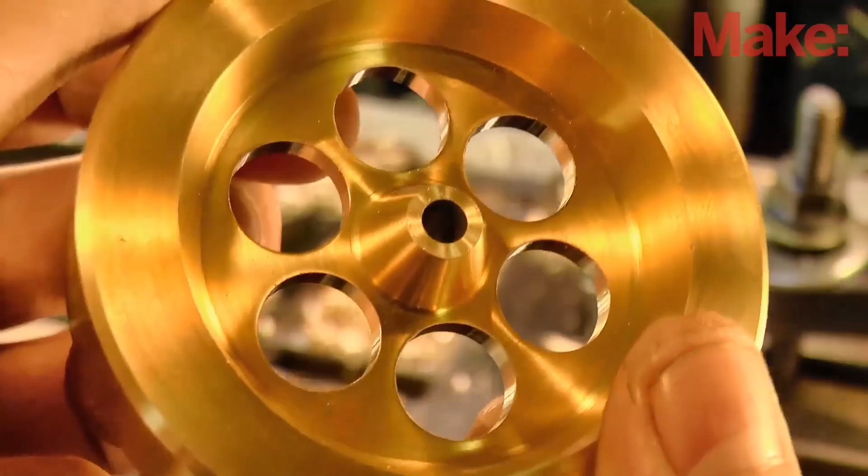In the previous video of this project, we made the flywheel for the gyroscope. In this concluding episode, we make the axle, frame and bearings and give it all a run.

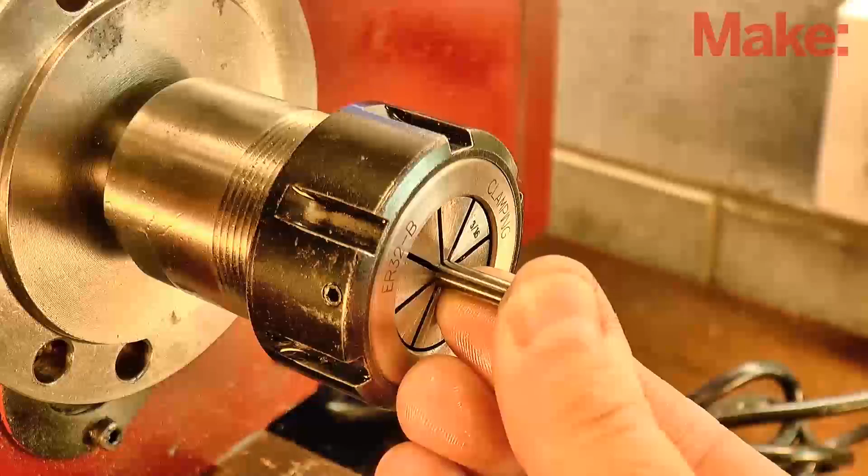Now we're going to start by making the axle, and much like the wheel, we'd like everything concentric when we finish with this part. So the way we hold the workpiece in the lathe is going to matter. You can hold the work in a collet and get it pretty close. Or if you have a four-jaw chuck, you can spend a bit of time with an indicator and get it even closer. Either way, we'd like to see the stock running as true as possible.

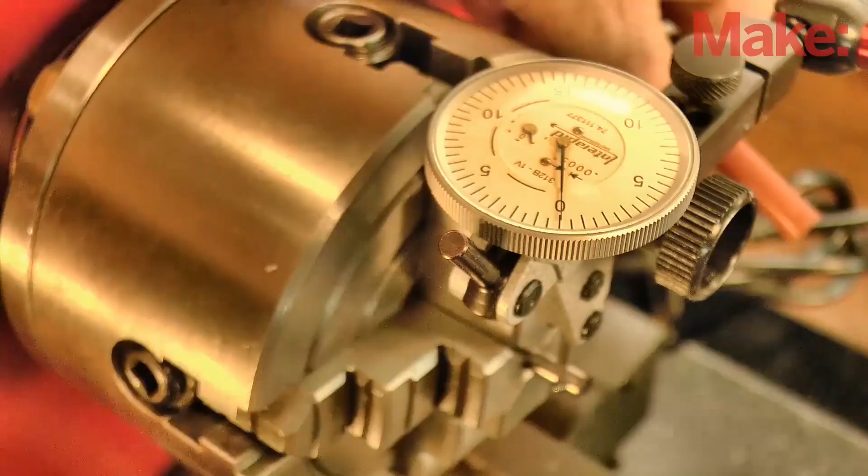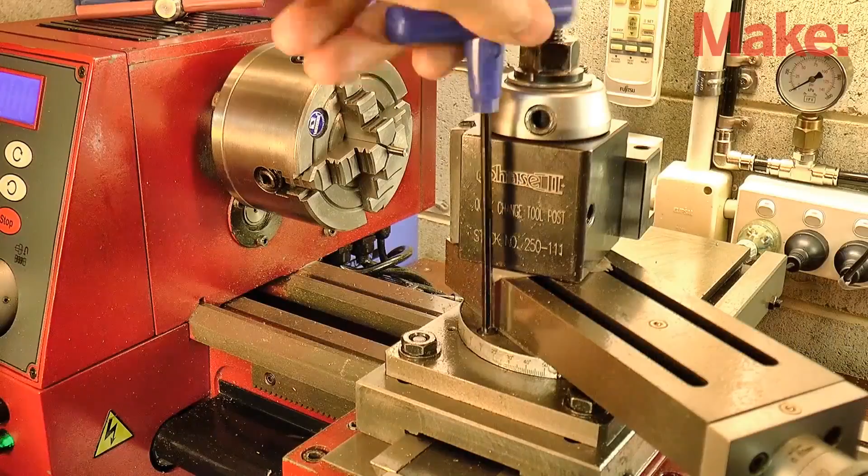If you only have a three-jaw chuck, you can get away with using that, but there'll be a small vibration when the gyroscope winds up to full speed. Once you're satisfied the stock is running true, set the compound to 30 degrees and taper cut each end of the rod.

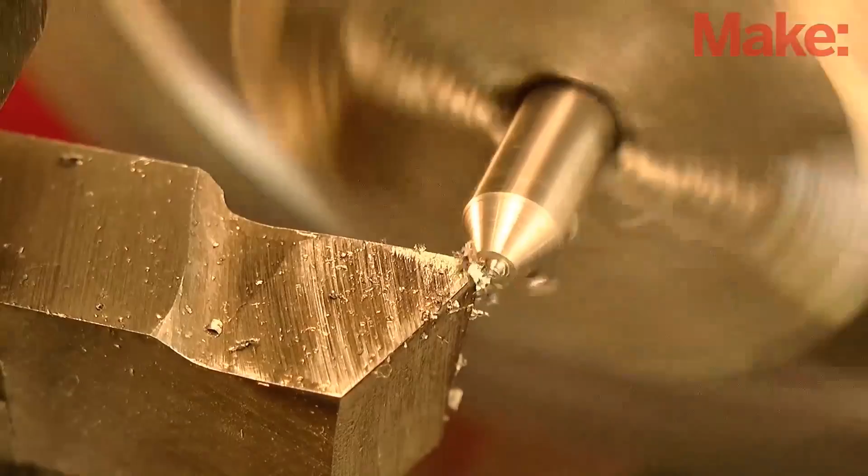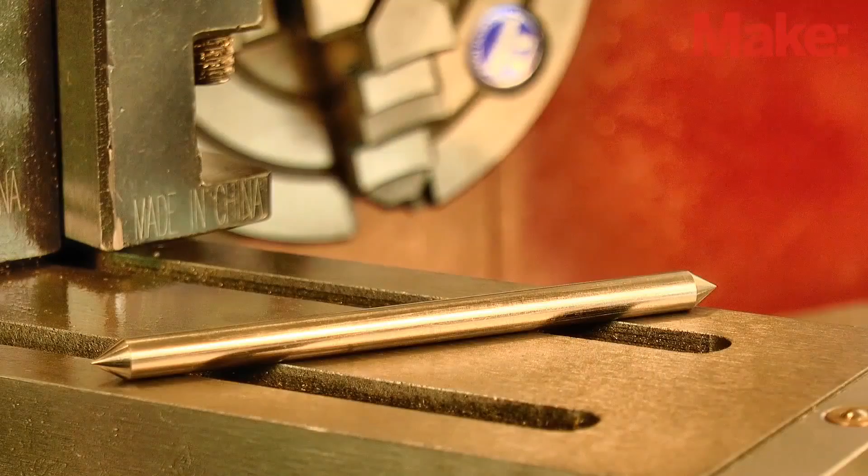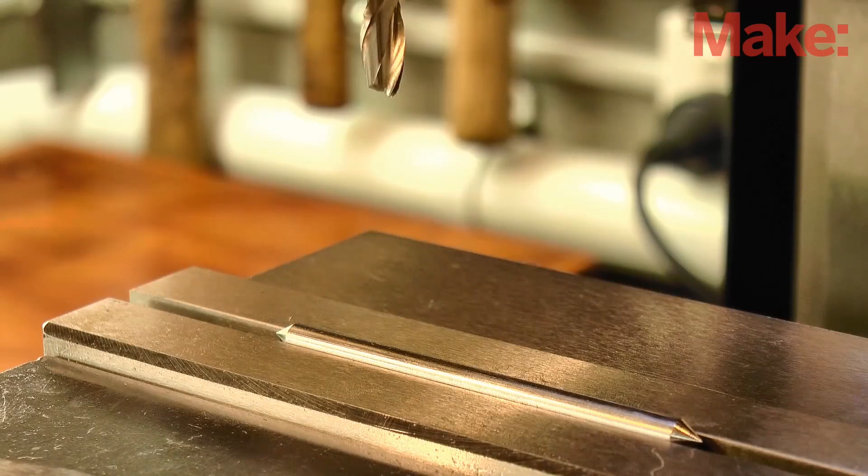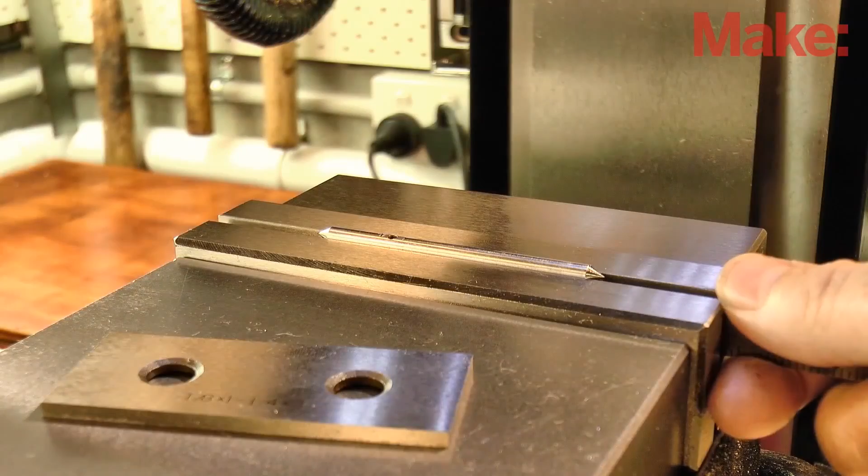Okay, next set up the work on the mill so we can cross drill a small hole for the pull cord. You'll need to mill a small flat on the top before drilling to give the bit somewhere to start. And that's the axle done for now.

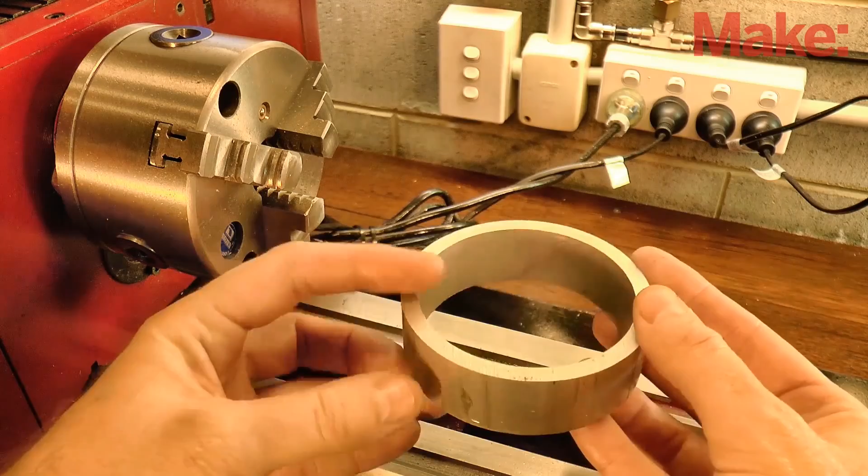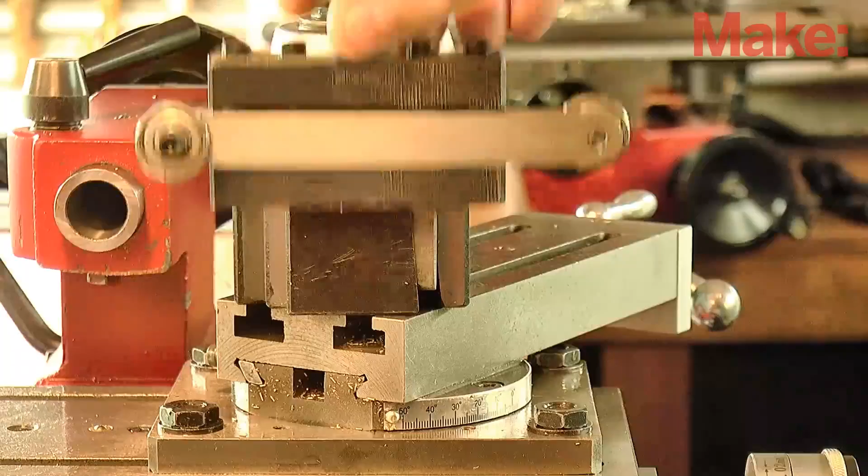Next we'll make the frame. And since it's quite a slender part, we're going to do most of the work while it's still attached to the parent stock. It'll make it more rigid and easier to hold. First, let's clean up each face on the lathe. And to do that, we need the tube running as true as we can get it. Now you can tap it true on the chuck to get it close, but here's a really simple tool that'll get you a great result.

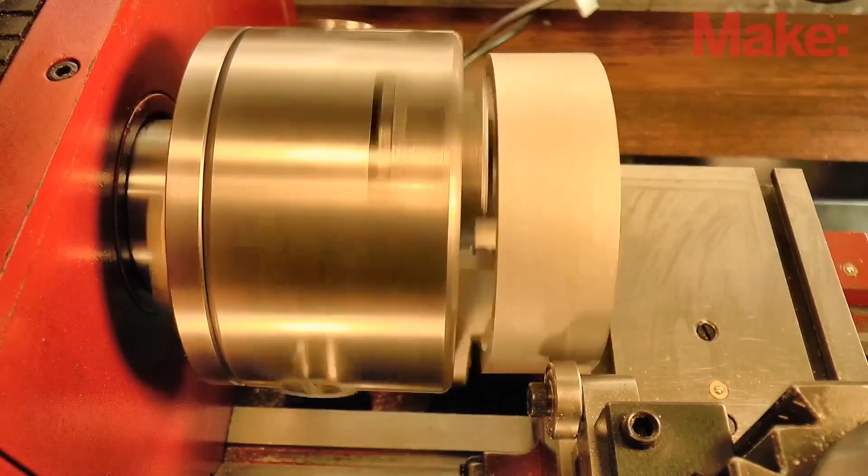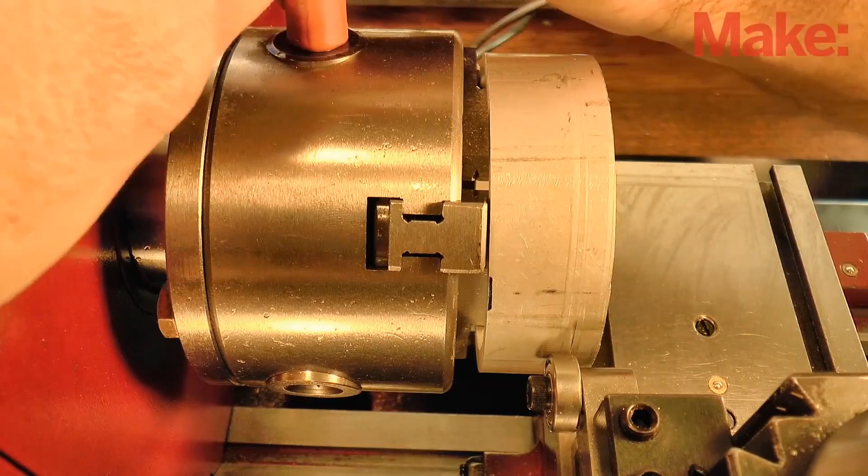It makes use of an interesting property of the lathe, where the workpiece will naturally try to centre itself when it's touched by an external force. The work is lightly held by the chuck, and then a light touch with the bearing sets it true. Once it's running true, the chuck can be tightened. It's reasonably straightforward to make one of these centering tools, and I think well worth the time spent making it, because it'll help you to centre a lot of difficult workpieces in the future.

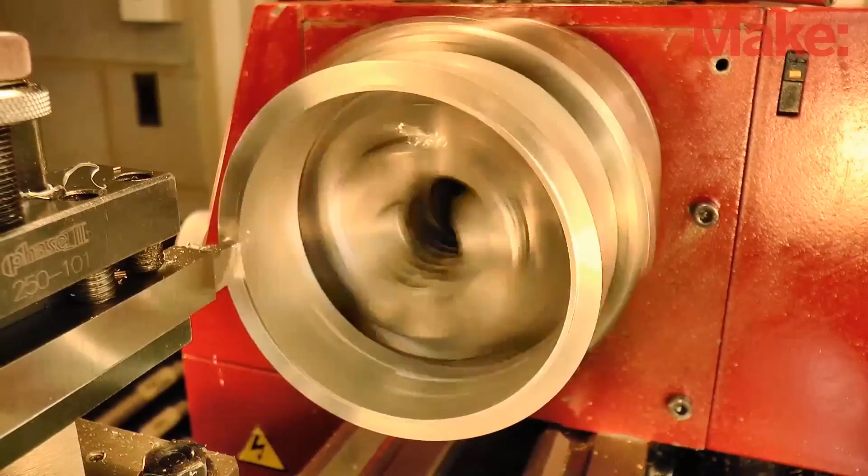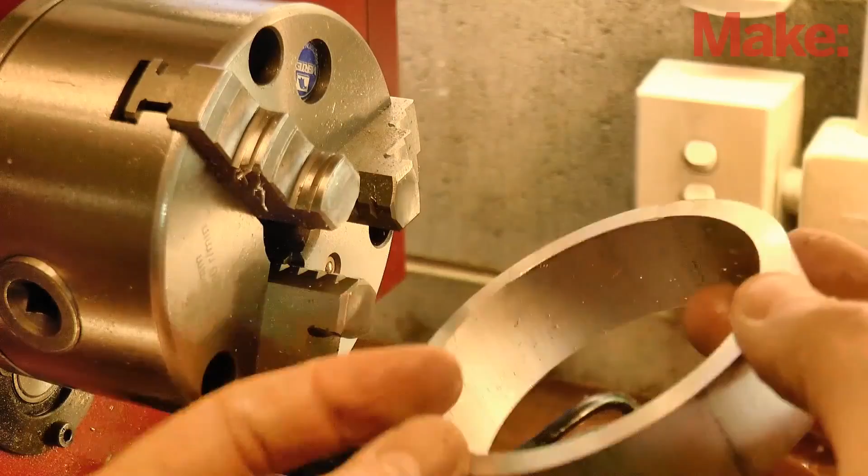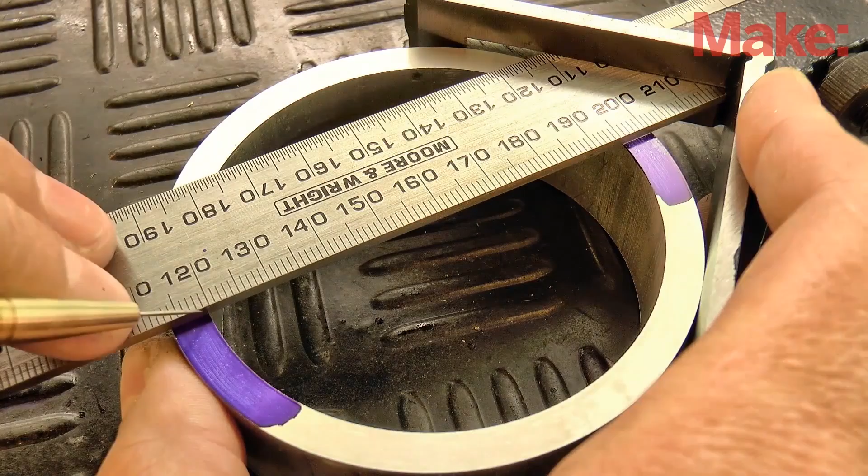Okay, so take a facing cut across one end and then remove the work and push that face up against the chuck jaws. With the other end face true, the workpiece can now be securely held in the vise on the mill. But before we head over to the mill, use a centre finding square to mark a reference line across the stock. We're going to use this line to help align the work as we drill and tap the holes.

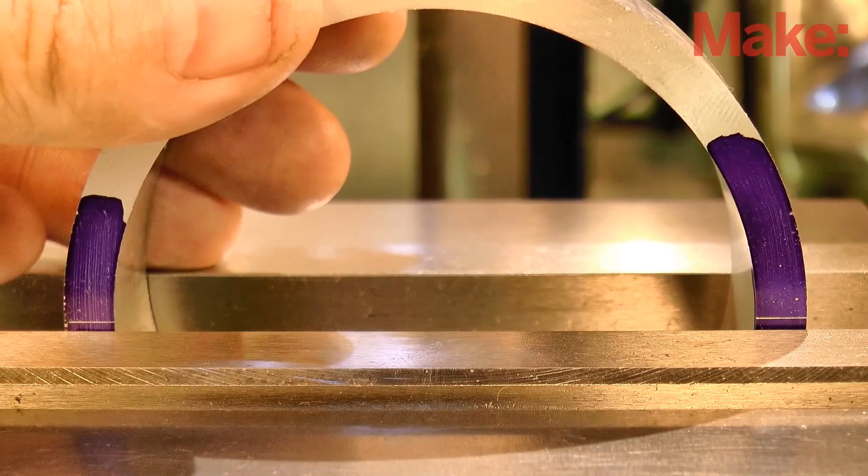Use an edge finder to pick up the edge of the work and then drill the hole for the bottom bearing. Now rotate the work, align the reference line with the vise jaws and then drill and tap the hole to match the thread for the top bearing.

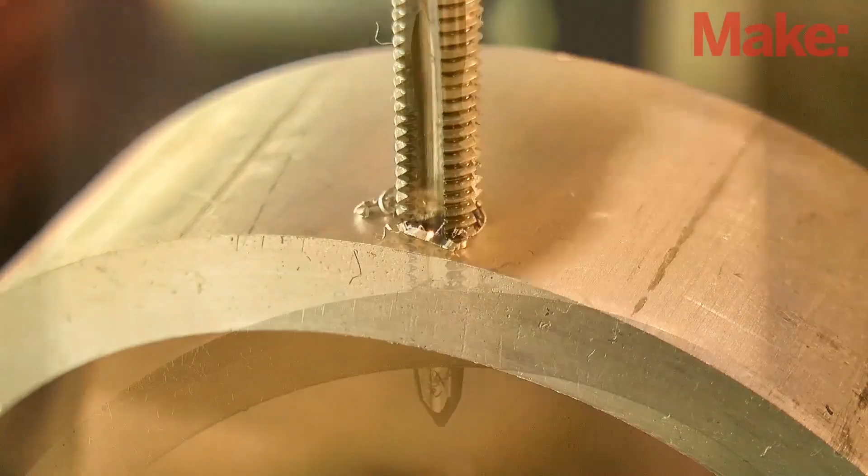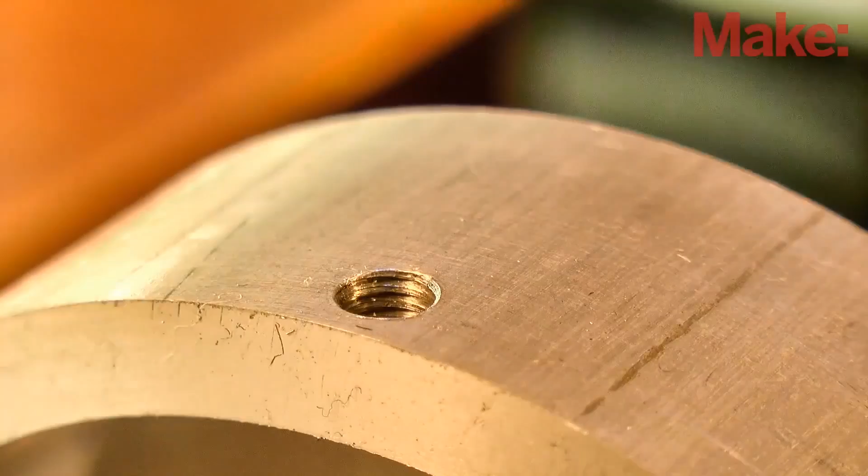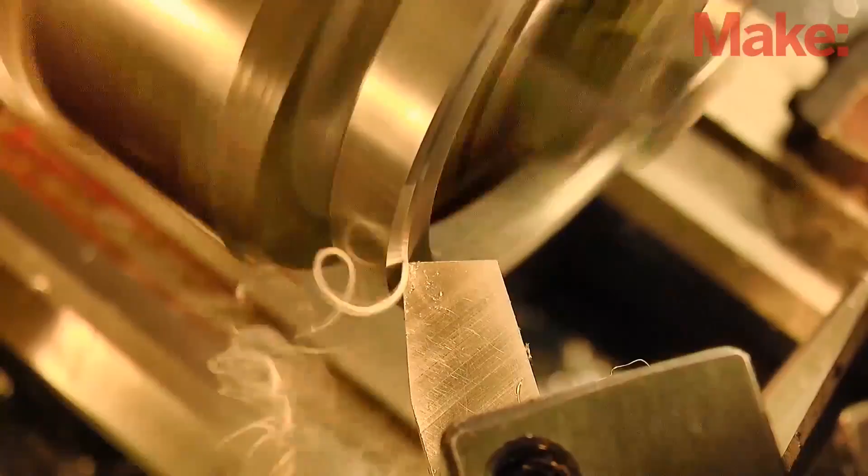Rechuck the part on the lathe, clean up all of the surfaces and then part off to the appropriate length. A quick rechuck the other way around and we can take care of the final facing cut and chamfer.

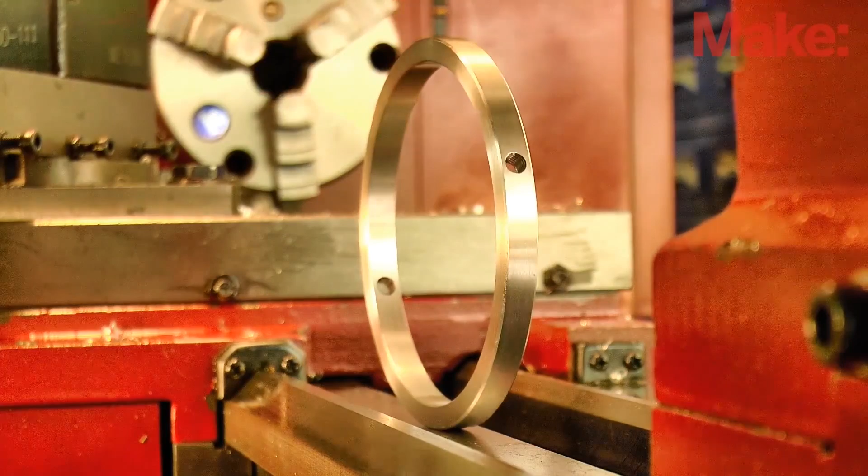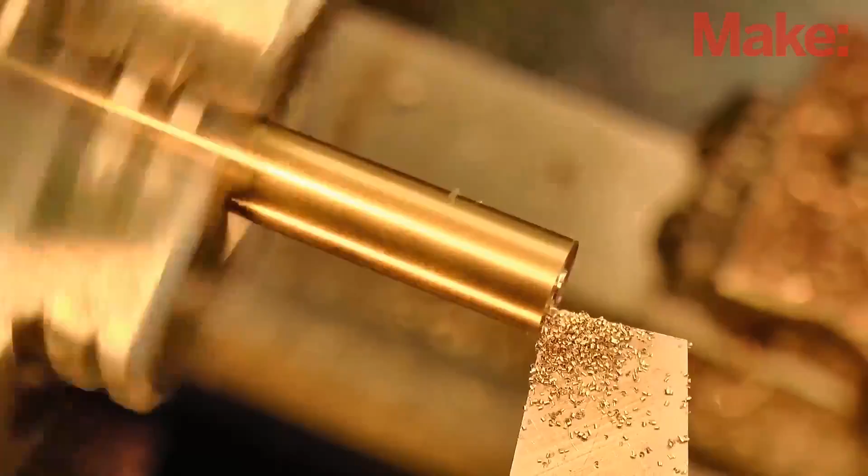Now let's take a look at the bearings. We're going to start with the unthreaded one first, so load the brass rod into the 3-jaw chuck and then reduce it to the correct diameter. And since we're about to form the inside bearing cone, now is a good time to talk about how these bearings actually work. It's a super simple idea. The point on the end of the axle sits in the base of the cone and it's essentially trapped. The only thing it can do is rotate. And because of the point contact, it experiences very low friction.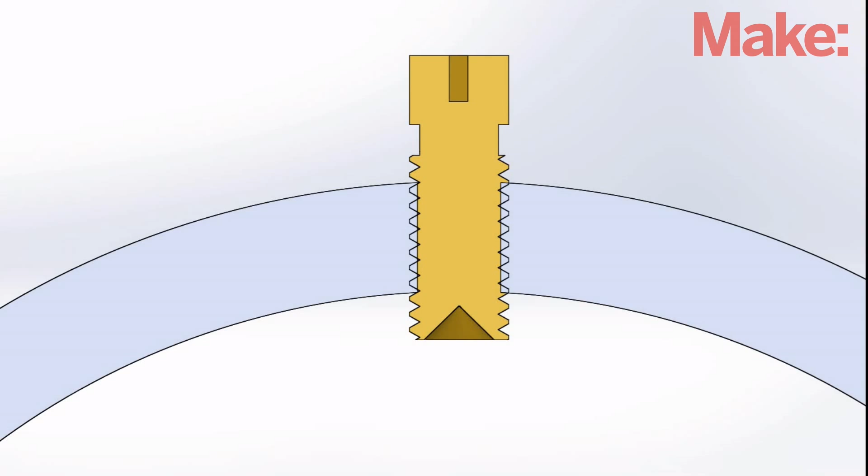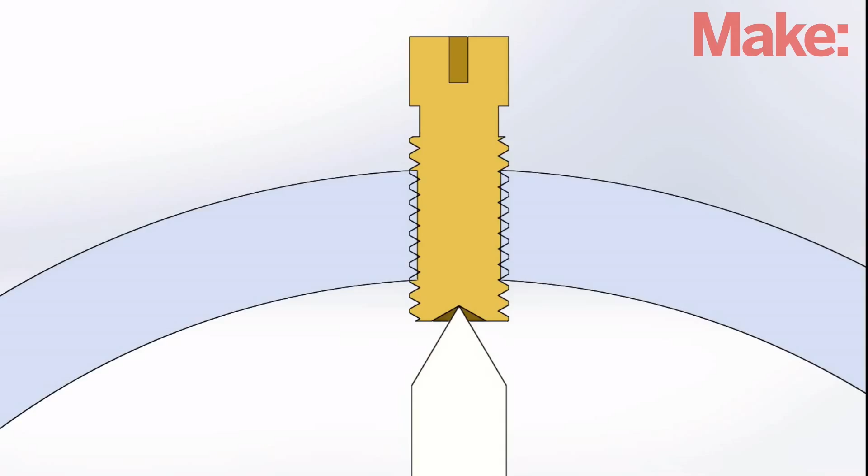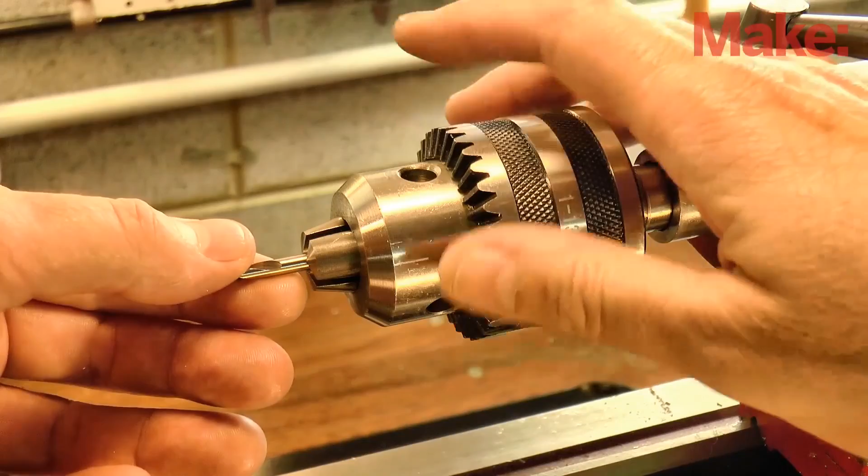Now typically a cone bearing like this would have a cup angle of about 80 degrees. But that would require us to make or buy a custom cutter, and I really want to avoid that if I can. So I've specified the cup angle to be 120 degrees. That way we can form the cup with a common drill bit like this. Now it means that the cup is quite shallow, so it's not as laterally stable as it could be, but I found it's quite okay for what we're doing here. So set up the tailstock for drilling and gently spot the end of the work.

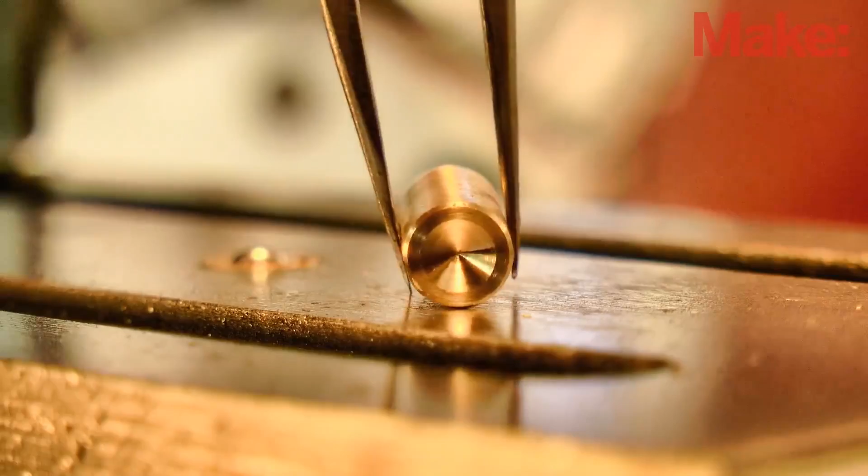Give the work a light chamfer and then part off, flip the part and rechuck. Drill a hole in the other end to accept the extension rods later on. The threaded bearing is formed in a similar way, except before parting off, use a threading die to form the thread.

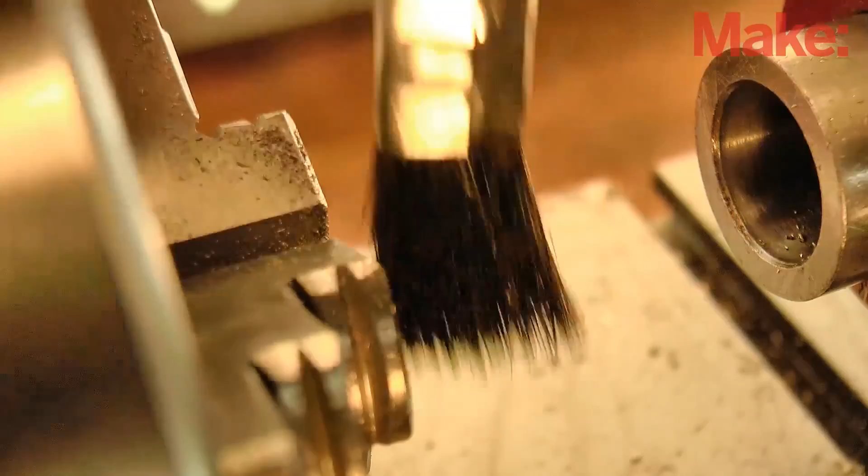Okay, now using a file or even a hacksaw blade, carefully form a small screwdriver slot. And we're on the home stretch now, with the final parts to be made being the base and the extension rods. The base is a reasonably simple piece of turning, with the cone shape formed with successively larger drill bits, and then all of the other surfaces faced and edges chamfered.

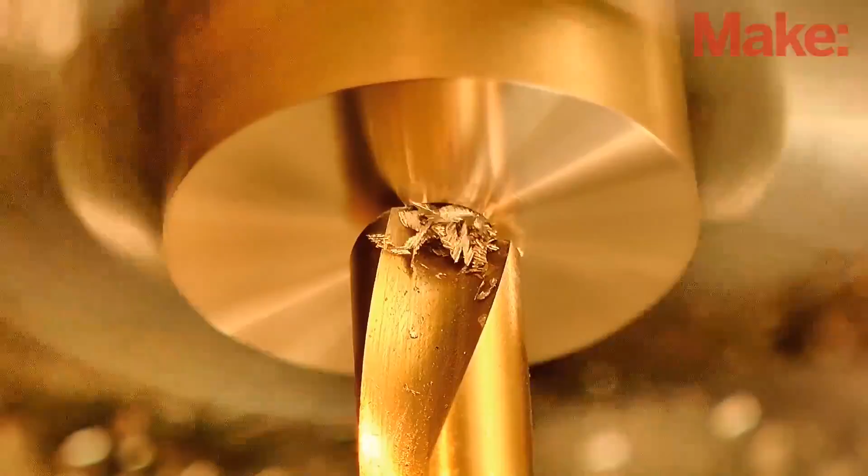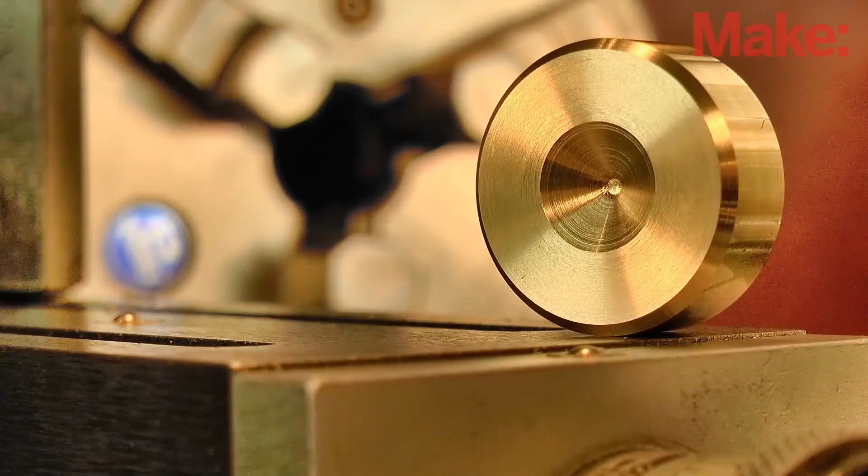Now to speed things along a little, off camera I made the pull cord using the string and wooden dowel, and I've trimmed the extension rods according to the plans. So with all of the parts complete, let's put this thing together and give it a run. Start by screwing in the top bearing. Now we need the axle to be centrally positioned within the frame, so put it into place and then insert the lower bearing. Once you've got the position right, a drop of Loctite will hold that lower bearing in place.

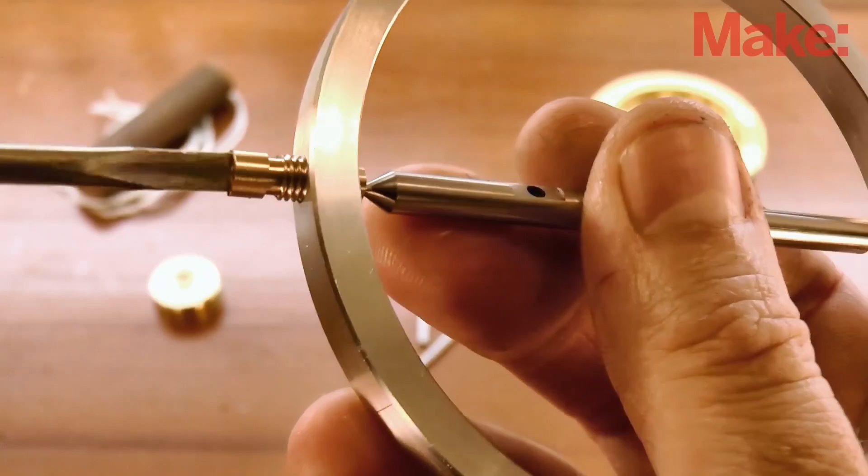Position the wheel on the axle and then put both within the frame. Move the wheel so that it has equal clearance on each side. As before, use a small drop of Loctite adjacent to the axle hole. And be sure to have the wheel exactly in the place that you want it before you add the glue. On a joint as close as this, the Loctite sets really fast. You can adjust the bearings to allow a little freedom, add a few drops of oil, and we're ready to give this thing a run.

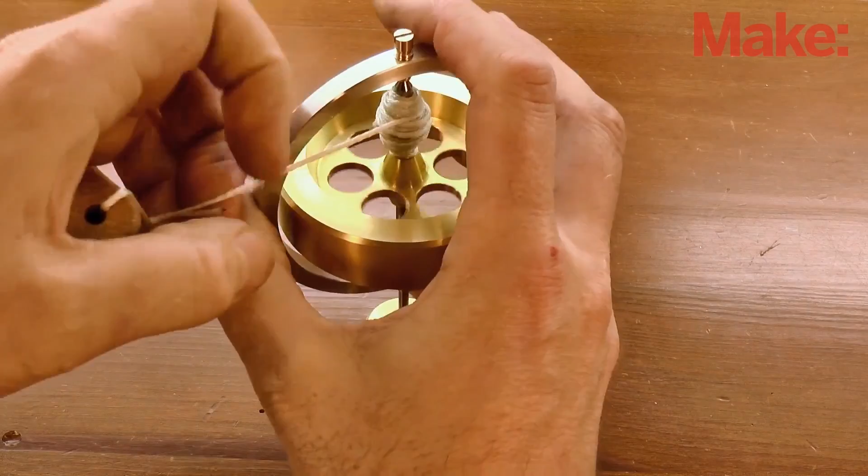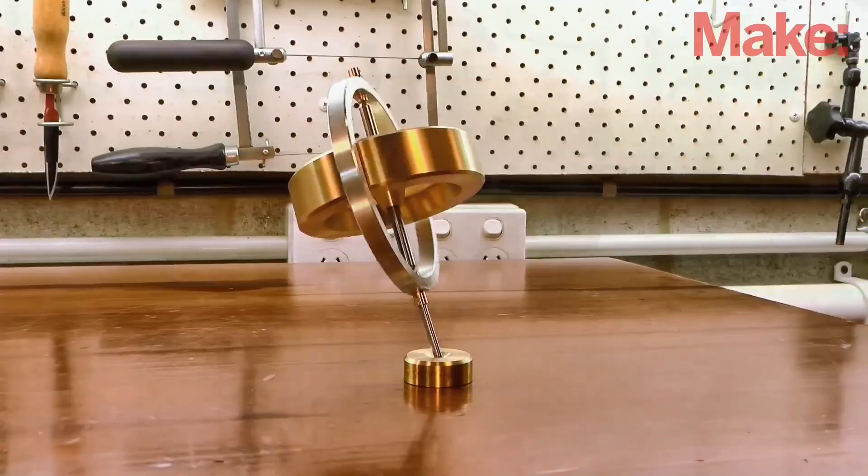So after all of our hard work, here it is, the moment of truth. Now the nylon cord works great, but I really wanted to see what sort of speed this thing was capable of, so I cranked up the air compressor to give it a bit of extra help. And wow, does this thing really start to perform once you get it on compressed air.